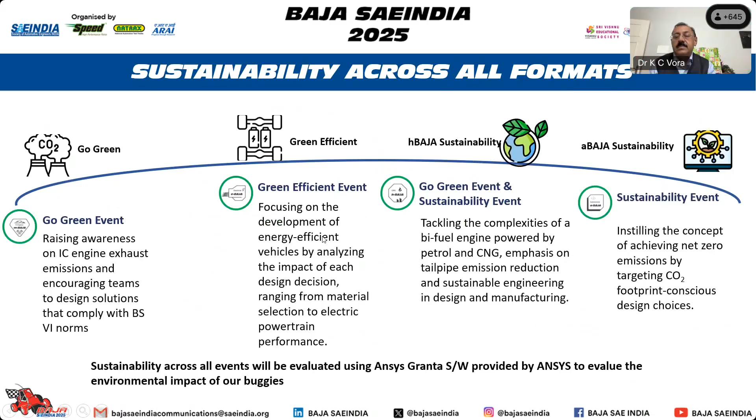Yeah. So it is very interesting to know that many students get on the spot offers, that is jobs or placement during the event. The event generally starts with an HR meet test. These days the HR meet test is done online. It can be taken before a month also. And after that there is a group discussion, interview.

After the event, the next day after the valedictory function, you have to be there for 2 days. And those students who get good marks in the Baja Aptitude Test, BAT test, they are invited to participate in the HR meet. Last year, in Baja 2024, we had Acropolis, we had BV Raju, where we had an HR meet. And in the first week of July, whoever is left can come to Pune, and at Ajinkya DY Patil University, we will be having an HR meet along with the Baja event.

This year we have altogether a new and dynamic team. We have Mr. S. Balraj, who is the chairman of the organizing committee. Dr. Pawan Goenka continues to mentor us as the chairman of the steering committee. And we have 2 young dynamic people, S. Hariharan and Yash Kakade, who are now the alumni head. So we have a steering committee, we have an organizing committee, and we have an alumni committee.

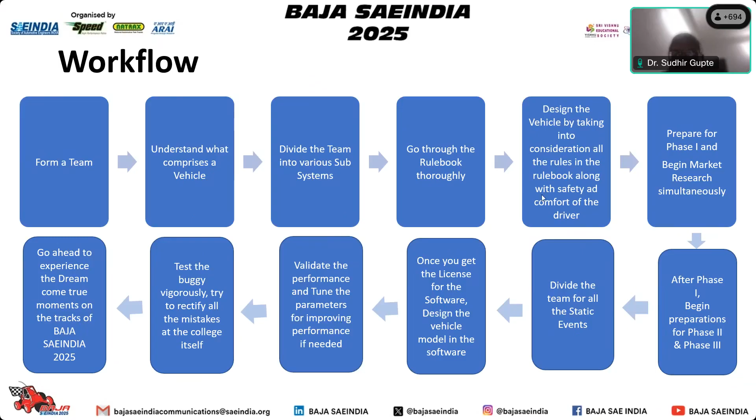If you are a new team, you'll have a common question as to how we go about this. Fundamentally, if you want to design any vehicle, you need to estimate the total weight based on previous vehicles built for Baja or otherwise. Then you start working on all your components based on the rule book, because the rule book will limit the combined power allowed to be used, that is 9 kilowatt and 48 to 54 volt motor voltage.

The rest are unlimited. You can swap batteries by using a low ampere hour battery or maximum 120 ampere hour battery. You can use different types of controllers and motor types - there can be BLDC motor, asynchronous motor, or hub motors. Some teams, I believe one team, had used hub motors. So you have the liberty to use any kind of motor, and then integrate all those components to build your vehicle. Next, test your vehicle, validate it, and then come for the competition.

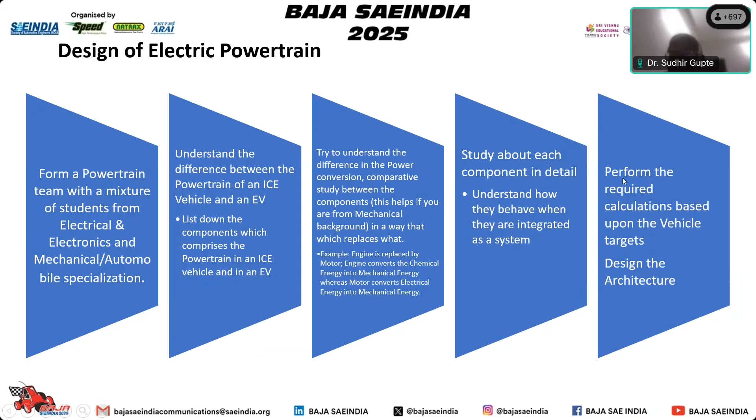We actually want you to decide the complete specification of each component that will go into the powertrain. We need you to decide limitations of max temperature, max voltage, max amperes consumed during charging or operation. You need to decide this kind of specification. We wish that you may be able to design your own BMS so you can give those specifications to the supplier rather than just buying one, so that you understand and learn.

When you're through with this event and go to work for an industry, you are actually able to deliver what you've learned. Similarly, with EV - electric vehicles - it's of paramount importance that you work very safely while building the vehicle, using tools insulated with rubber insulation, so that the driver is also safe. Next slide, please.

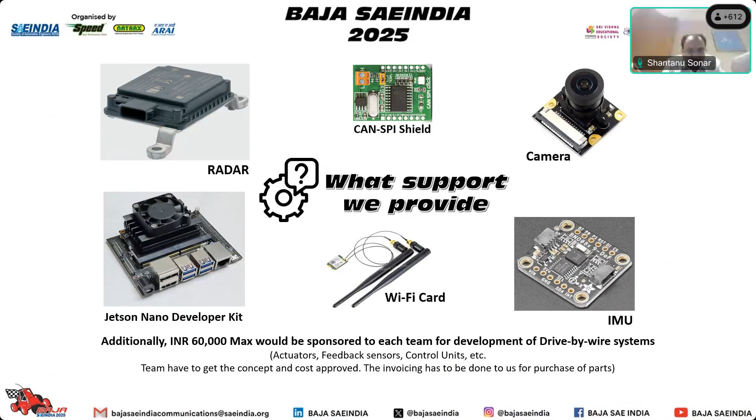So how to get onboarded? Of course, as Vora sir mentioned, phase 3 is yet to be completed, so we haven't yet opened for the 2025 registration, which we are working pretty hard to complete soon, possibly in July. But nevertheless, if you find this quite interesting, feel free to write to this email address, express your interest, express your thoughts, any questions that you have. We can of course answer it towards the end of the session. Nevertheless, you write back to us and we will try to give you the best possible answer.

And that brings to the end of my presentation. Thank you very much and wish you all the best. And I hope to see more and more participation in the Autonomous Baja as well, along with the remaining chapters. Thank you.

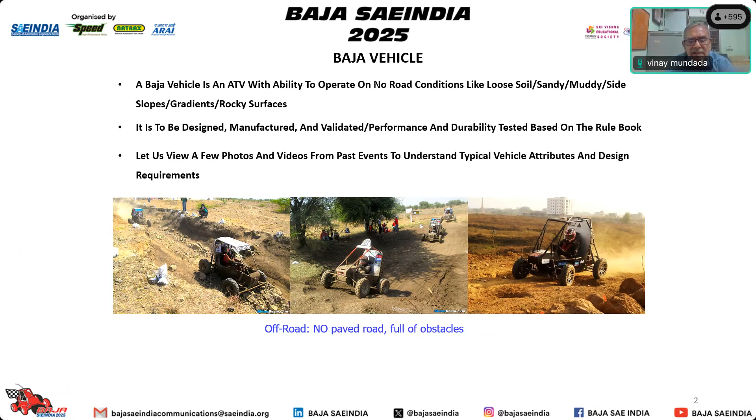Some more pictures from the terrain and the different tracks. The one in the center is the suspension and handling track. You can see how the vehicle has to really traverse through these - a combination of obstacles, side slopes, loose soils, drops, and all that. The wheels are likely to either fling in the air, get stuck, or lose contact with the ground. In all these conditions, it becomes very necessary that the systems are designed to handle this, particularly the suspension, brakes and steering, which will matter a lot in terms of maneuvering these kinds of terrain.

As far as the roll cage is concerned, once you stick to the rule book parameters specified, the roll cage is extremely safe. There are no issues with the roll cage, but all problems and issues start mainly with the suspension, brakes and steering - these are the three. And the drive line, if laid out properly, normally has no issues either. So let's go to the next slide.

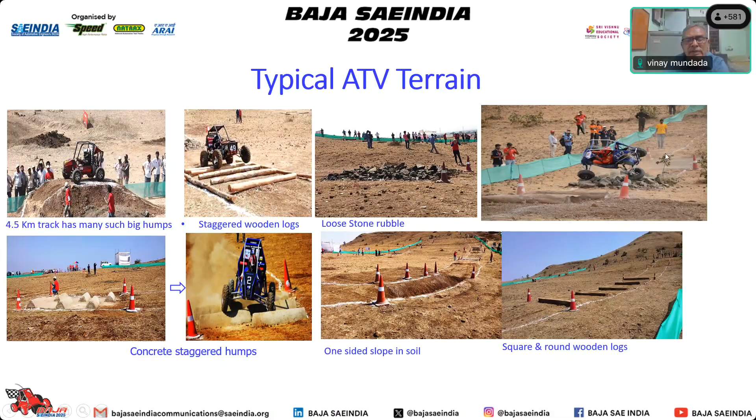So once you've had a look at all these slides, to summarize: it's off-road or no-road situations, obstacles, and the lower body should not get stuck over the obstacles. Surfaces vary - looking at the coefficient of friction from the road, it may vary right from 0.3, 0.25 until let's say 0.8. So this kind of wide variation, the vehicle should be in a position to take over.

It's necessary to know that all four wheels may not experience the same road friction. All four wheels may be on different road surfaces as you traverse the terrain, giving different tractions to each wheel. This is where four-wheel drive or all-wheel drive comes in handy, because once you have powered all four wheels, you are in a position to negotiate all terrains very easily, unlike the 4x2 versions we used to have in the past, where only the rear wheels were powered and the front wheels were not.

So this gives you the feel of the terrain and the requirement for why four-wheel drive is necessary and how it is helpful. The road is not straight - quick sharp turns are required to keep the vehicle on the base path, avoid obstacles, narrow paths, and focus on the terrain all the time. The vehicle can roll over any time, hence driver safety and the roll cage are important.

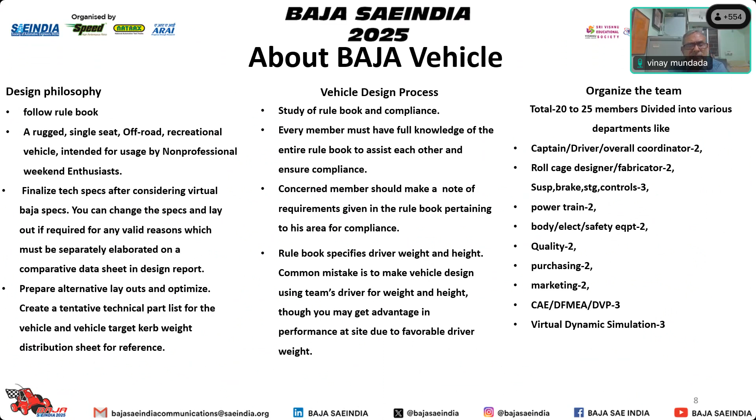Most important criterion is, once we have made these alternative designs, select the one which is best. Do the CAE simulation, virtual static dynamic softwares, use all that, so that your validation as well as the virtual simulations would be very close to each other and your validation times can be reduced.

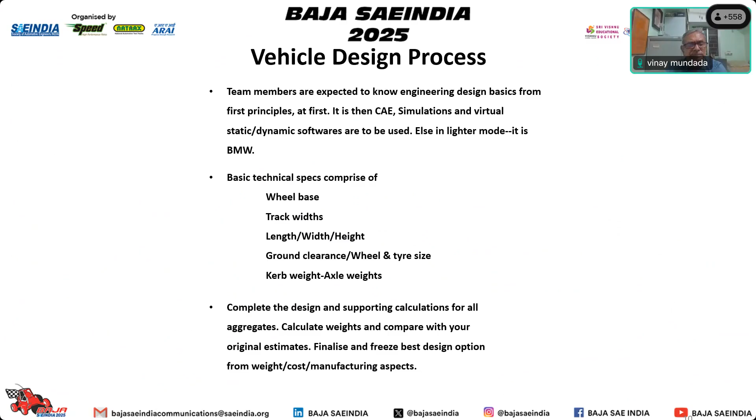In the workshops which have taken place and which will take place, all these points will be covered individually from the aggregates. Coming back to suspension, brakes and steering, there are a few points which have been listed, which will be elaborated during our workshop for the 2025 Baja. Some of them are listed here—you can have a look, but we will talk about it more during the workshop. Next slide.

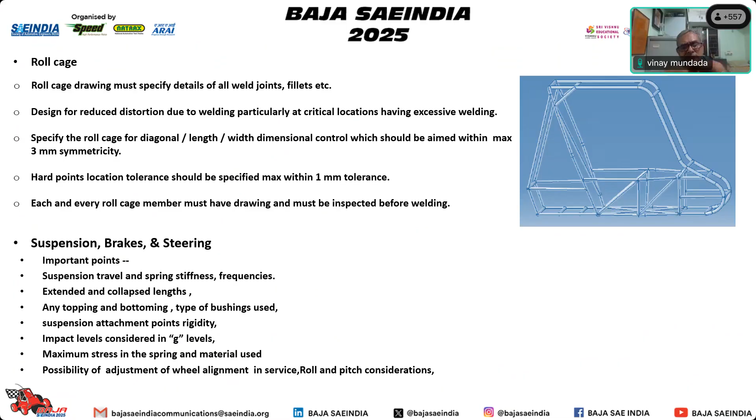So something on the brakes. Now here I would say this is one of the key points in all the vehicles, whether E Baja, H Baja, A Baja, M Baja, take any Baja—we have a major issue related to brakes.

Passing the brake test given in the rule book is mandatory, and this is the toughest, where a lot of teams fail to make the brakes pass as per the criterion laid down in the rules. So this must require the maximum attention from the team. Unfortunately, even after 16, 17 events we have had until now, this remains the sore point. This is primarily because of the lack of understanding of the brake as a subsystem and its requirements, and the shortcuts which teams try to take, which creates the problem.

Otherwise things are pretty simple with the brakes, particularly if you are able to have a good braking system for M Baja, common to H Baja, E Baja and others, other than A Baja, because in A Baja you are likely to have a different controlling system for the brakes, which may take care of all the brake related issues. But for the other three vehicles, your brake system has to perform as a mechanical brake system.

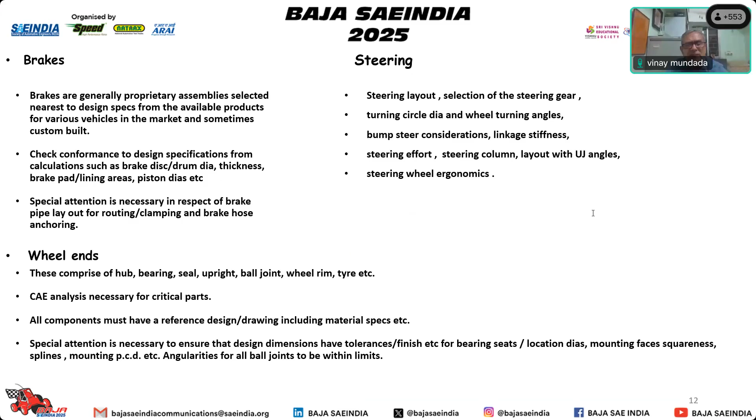So coming to powertrain, this is a very welcome situation this year in 2025. We have been using the Briggs and Stratton engine all these days. Now, as we are advancing so much into Baja, where we have different engines and different powertrains, E Baja has a different electric powertrain, A Baja is having superior driving control with the autonomous feature on the Baja vehicle. So Baja should not remain stagnant. SAE India has decided to encourage students to explore powertrain for the Baja vehicles.

So you are free to choose any engine now within a given specification, which will be the cubic capacity and the power band, which will be informed to you shortly. And you can select any engine of your choice within that CC and within that power band. And you can tune the engine as per what you need and integrate that engine into your buggy. So this is a new challenge and a new interesting feature which is being added from the year 2025, something which the teams can decide.

The older teams or the returning teams who have got a Briggs and Stratton engine, they have a choice to use the Briggs and Stratton engine, whatever they have. The other teams who would like to still continue with Briggs and Stratton engine - because we are not going to have this association with Briggs and Stratton anymore - you could even borrow the engines from other teams who are not participating. It's your choice. Or you can look for other engines, for which some recommendations will be made from our side within the given cubic capacity range and power range.

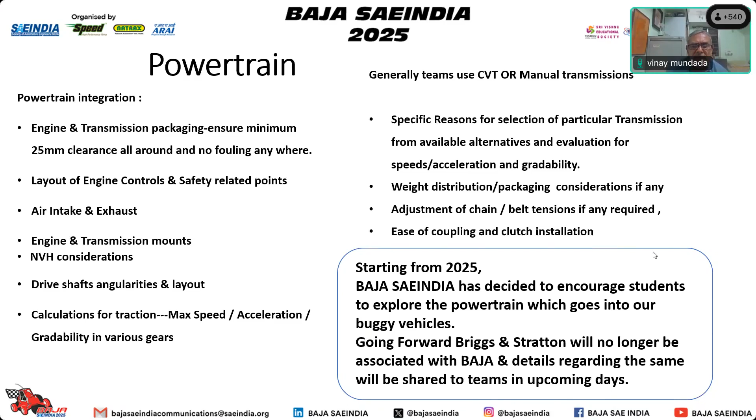Next one. I think I will skip these slides. This is feasibility for mass production.

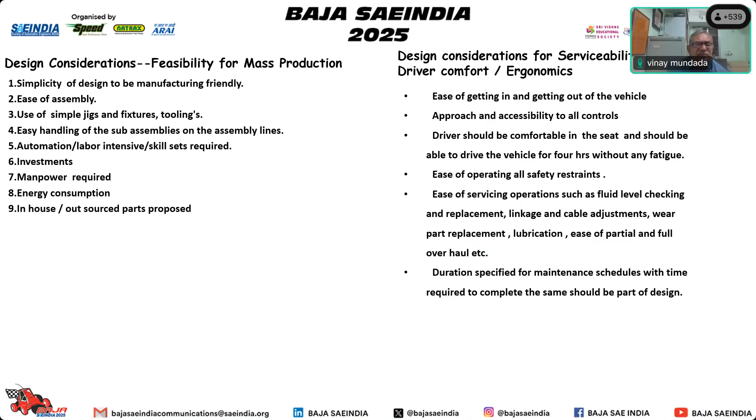These are various design considerations: serviceability, driver comfort, ergonomics, quality by design, quality by build. Once you take care of these things, it is very easy to pass your technical inspection in the first go. There are two important things.

One is clearing the TI very quickly so that you are eligible for the brake test. TI clearance will depend totally on how you design, how you make quality by design and build. This is very important, and these tips will also be given during the workshops which we will conduct.

So these are the parameters which are going to be very important to you, considering that you need to clear. Finally, the proof of the pudding is eating, and for that, it is necessary that you ensure all these things are absolutely done properly, so you don't have any hiccups or problems when you come to the track site for the event.

This should be your extremely important focus right from now, to ensure that your focus is TI clearance in the first go and the brake system completely adhering to requirements and passing in the first instance.

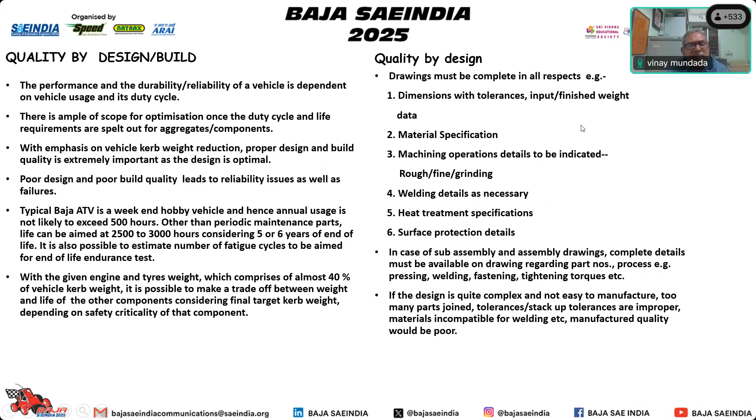Get organized properly: bill of materials, technical part, all these we will cover during the workshops also. For simplicity, keep the design simple. This is very important.

Make the thing simple. Don't try to get into complications of any kind. First, try to be as simple as possible, but very effective. Technical clearance, TI inspection, brakes, and that's it.

And enjoy the event, being in a position to participate in all situations. So you must organize everything very properly and try to be as simple as possible in terms of everything in your design itself, and also usage of facilities and inspection equipment, and basics should be right.

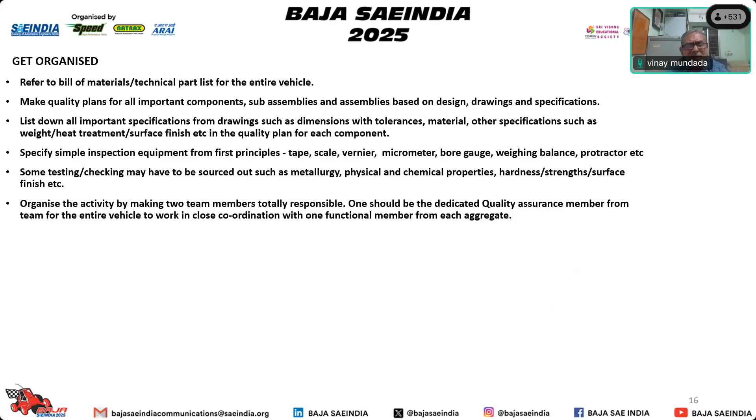Next slide. So this I need not go through. These are various systems. Next slide.

Fasteners is one of the things which somebody from your team should take care of. He should be only a fastener guy. He should fully understand what is the grade, what is the quality, what surface treatment is required, what about the locking, various types of lockings, whether it's a nylock nut or a castle nut, or different types of washers being used.

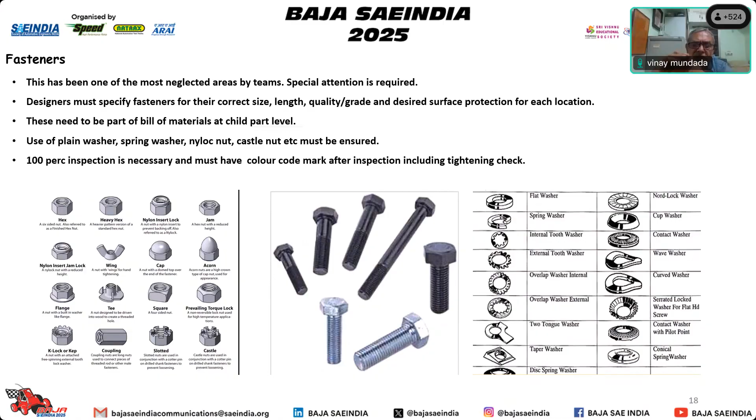Because finally, it is all about joining many things together, and when you are joining so many aggregates everywhere, fasteners come in. So I would say a team having an exclusive fastener guy who has fully studied all the implications of using various fasteners would be a boon to that team. Please ensure this is done, and most of the battle will be won here itself. Next slide.

Next slide, please. Now, finishing and surface protection, though not very important,

because you are only there for a little while, but in order to make the vehicle build appear properly, there should be no rusting during this period, from the completion of the build of the vehicle to the end of the event. So these things have become equally important.

So this comes last, but it also makes a difference in terms of the satisfaction of seeing your vehicle, which is well finished, well built, well surface protected, and you feel happy about it. And of course, judges would always like it.

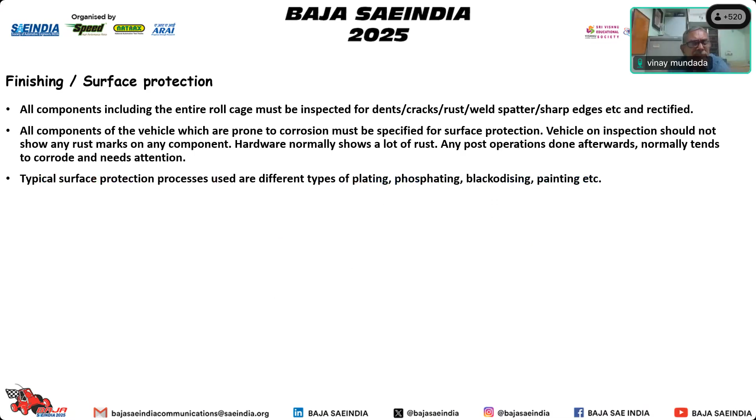Next slide. Thank you. So I think I did try to give you a brief overview at this stage, at the inaugural session, of what is important. Once again, let me summarize.

Whether it is A Baja, E Baja, H Baja or M Baja, the basic buggy still remains important. Aggregate design remains important. The powertrains are changing, and the degree of the various ways of controlling the vehicle changes. But if your base vehicle is perfect, everything else will go smoothly.

Else, you will not get that joy and satisfaction from the other events also, at the event. So I wish you all the best, and once again I emphasize that everybody should read the rule book thoroughly.

If questions are there on the rule book, put it on the forum. Read those 4 textbooks which have been listed. Whosoever is dealing with whichever aggregate must read the relevant chapters, note down his questions, and ask those questions on the forum itself or during the workshops. That will help you a lot and understanding will be more clear.

My desire is that 65 to 70% of teams must clear on the first go the TI as well as the brake, so that we see so many vehicles running on the track during the endurance and you will be satisfied. All the best to you. Thank you very much.

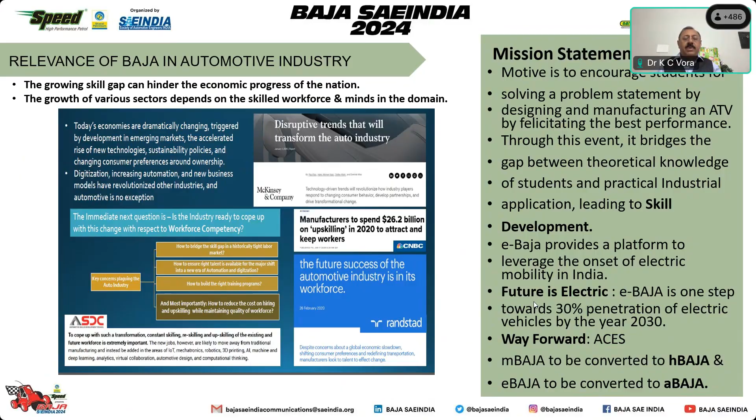In the next slide, you know that hydrogen is one of the lightest elements. It is a very clean fuel because what comes out is just water vapor. And if the temperatures are very high, there could be nitrogen also, NOx also. But it has very high energy content, the calorific value of hydrogen is very high. And hence a lot of research has been done in this area, how hydrogen can be employed in IC engines.

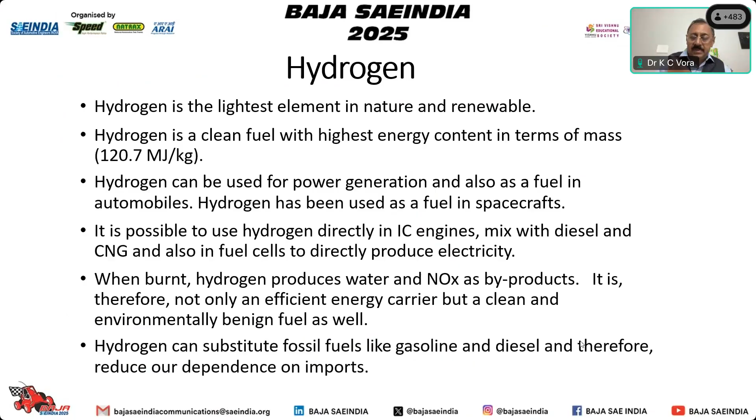So in case when we want to use hydrogen, we have to be careful because hydrogen is highly flammable. And you cannot see hydrogen, you cannot smell hydrogen. Hence it is very difficult to find out if there is any leakage of hydrogen unless it catches fire.

Our Prime Minister has declared that we will become energy independent by 2047, and we will achieve net zero by 2070. That means we will not have to import any energy, fuel or crude petroleum from outside India by 2047, and there won't be any carbon dioxide emissions by 2070. We are all working towards reduction of carbon dioxide, whether it is automobile or whether it is anything else. So India has a vast renewable energy source, also an opportunity to produce green hydrogen for the world. So we will talk about green hydrogen in the subsequent slide.

Let's go to the next slide. Ministry of New and Renewable Energy, MNRE, Government of India is the nodal agency driving the hydrogen program in India. MNRE first started a roadmap on hydrogen in 2005 under the chairmanship of Sri Ratan Tata, and the target set was 1 million hydrogen vehicles on road by 2020. However, we were not able to take off because hydrogen as a fuel was not available. So subsequently in 2013, one more Apex Hydrogen Committee was formed under the chairmanship of Dr. Kasturirangan. They made 5 subcommittees and gave their proposal, and that is the hydrogen roadmap, which you will see in the next slide.

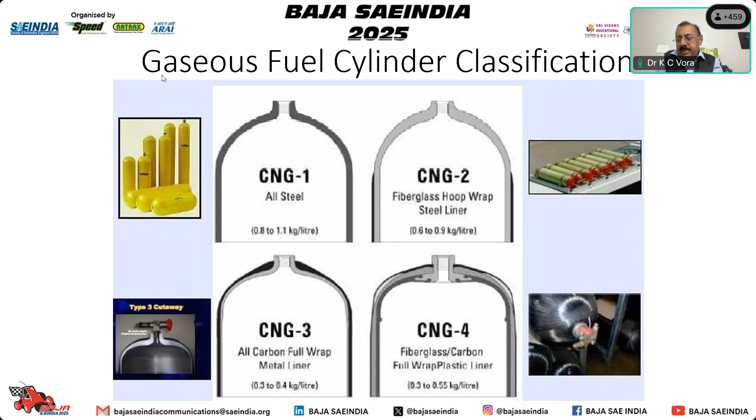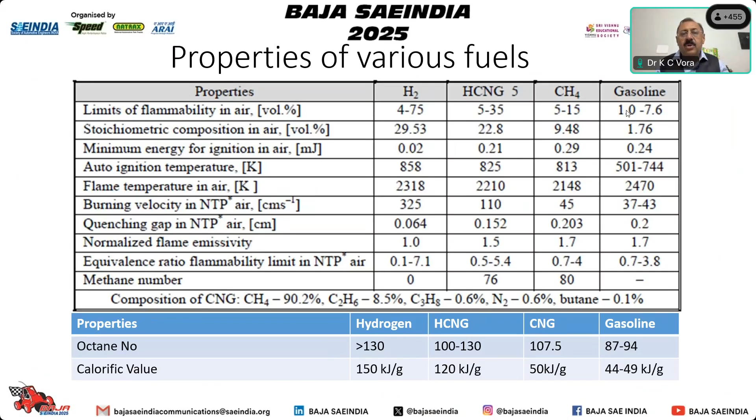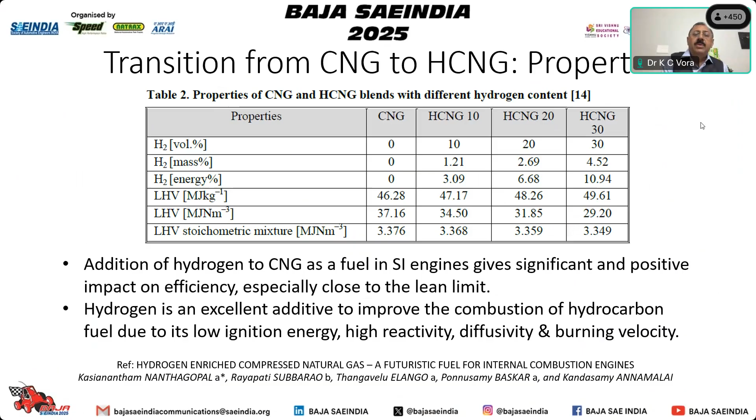Let's talk about the transition from CNG to HCNG and HCNG to hydrogen. Here is an example where you use 100% CNG or CNG with 10% hydrogen, 20% hydrogen, 30% hydrogen, and you can compare. All this you can do using a software called GT Power. All those who participate in H Baja will get a free license of GT Power by Gamma Technology, 3 licenses per team, and you will do the simulation using GT Power.

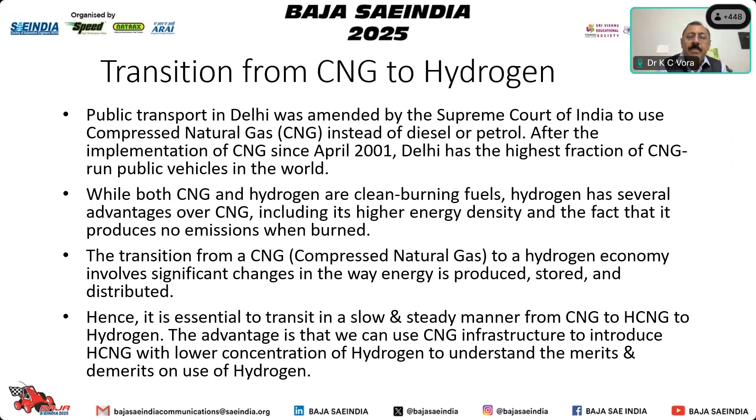We talked about transition from CNG to hydrogen, and very soon you will see the country using HCNG. Delhi has already started using 18% hydrogen in CNG in some stations, and slowly this will move to various cities. When you start working on the BAJA event, you will be using a BAJA vehicle - suspension, steering, brakes, roll cage, everything will be similar, as Mundra sir has explained. The engine may change - instead of a carbureted petrol engine, you can go to a fuel injected CNG engine.

You can work on bi-fuel mode. That means it can be CNG or petrol. When CNG is exhausted and the CNG station is not nearby, you may have a 3 liter or 5 liter petrol tank where you can use that petrol to run the vehicle till you reach a CNG station.

So the road to sustainable mobility moves from conventional vehicle and conventional fuel, that is petrol and diesel, to alternate fuels like CNG, LPG, ethanol, methanol, biodiesel, and then slowly towards hybrid and electric vehicle technology. We have already reached that stage, and now we need to reach tomorrow towards hydrogen technology.

So quickly, a couple of slides on Hydrogen BAJA, how we started this event. When the National Green Hydrogen Mission was launched in 2023, we decided that we will also start working on CNG, HCNG, and hydrogen.

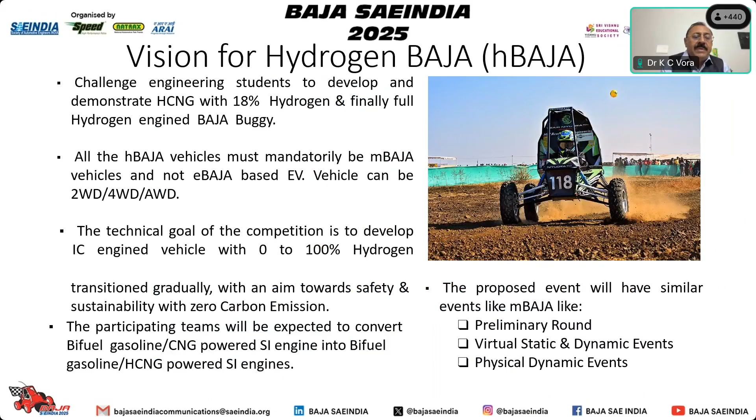So basically, we will use a bi-fuel mode, gasoline and CNG, and the same can be then converted to gasoline and HCNG. For this, the engine would be fixed. We have tied up with Greaves at Aurangabad, who will be supplying this engine.

The engine is similar to the Briggs and Stratton engine. Briggs and Stratton is a 10 horsepower engine. This is also a 10 horsepower engine, so the same power you will be able to use.

When you use CNG, the power goes down by around 10%. When you use HCNG, again you will get power equivalent to or slightly higher than a gasoline vehicle, depending on the percentage of hydrogen in the fuel.

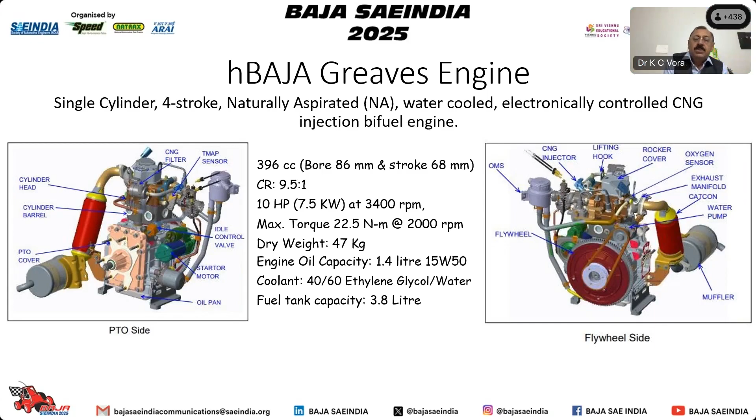So with this bi-fuel mode CNG engine, we have got a discount from Greaves, based on which Advantex will give us the fuel injection system. Atul Auto is helping us in the application engineering, and based on that we will be running the event.

So here you have to do a literature review, understand the safety aspects, and then when you start the project, you will divide the project into 2 parts. You can get CNG or HCNG and run it on an engine dynamometer.

Or you can do a computational approach using GT Power and do modeling and simulation to find out what happens if you shift from CNG to HCNG, and if you shift from HCNG to hydrogen. Then you can compare your physical data with the computed data, and that would be a validation.

So last year, in BAJA January 2024, the first Hydrogen BAJA, there were 10 teams, but finally 3 teams were able to successfully come to the site with CNG: Team Sanskara from Aurangabad, Team Tarusa Motorsports from Cochin, and Team Amigos from Vishnu Institute of Technology, Bhimavaram, a place in Andhra Pradesh. The winner was Tarusa Motorsports from Cochin.